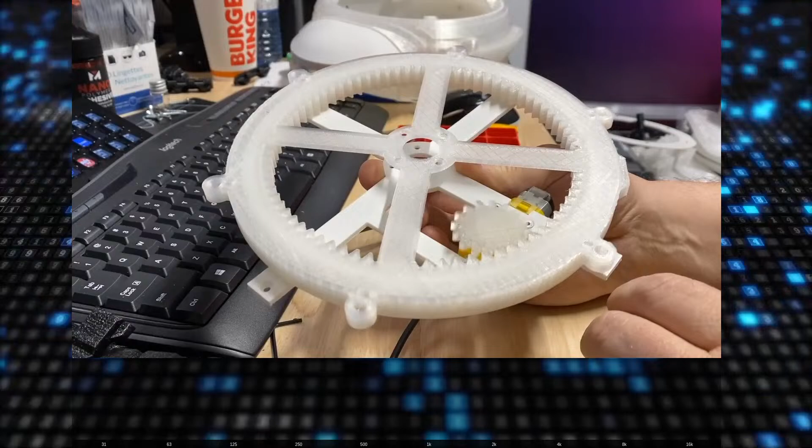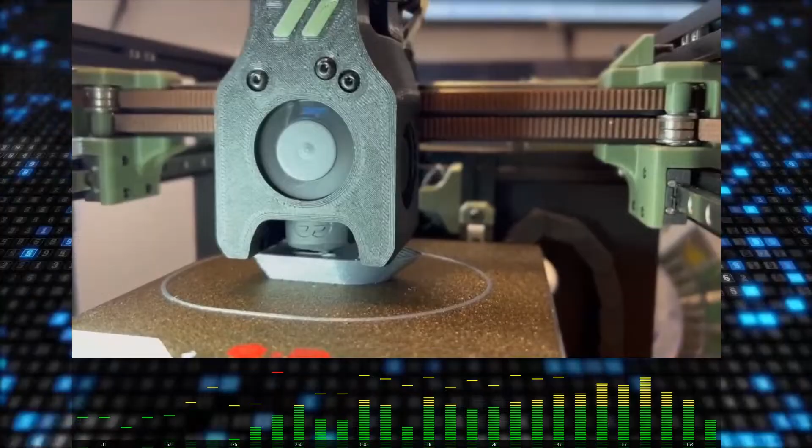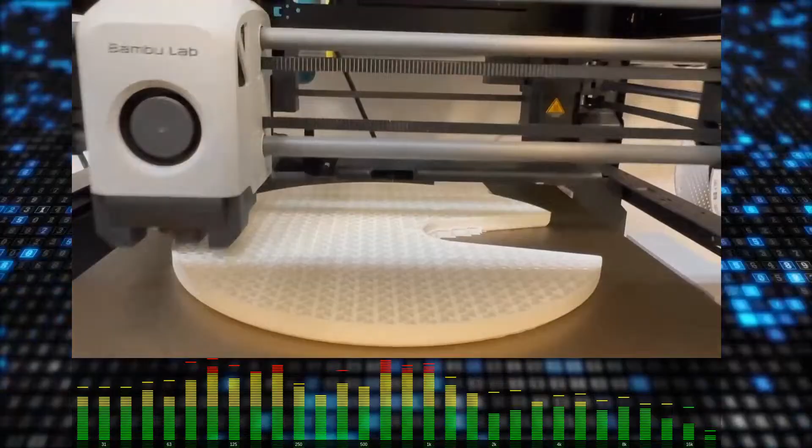Flip the switch, light the fire, idea spinning higher, higher. Testing, melting, shapes take form. Welcome to the stream, doing 3D and laser dream. Cut it, carve it, build.

Flip the switch, light the fire, idea spinning higher, higher. Testing, melting, shapes take form. Welcome to the stream, doing 3D and laser dream. Cut it, carve it, build the same.

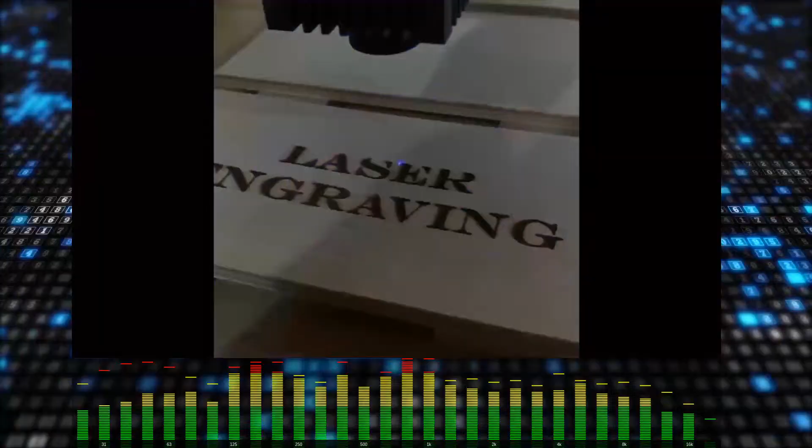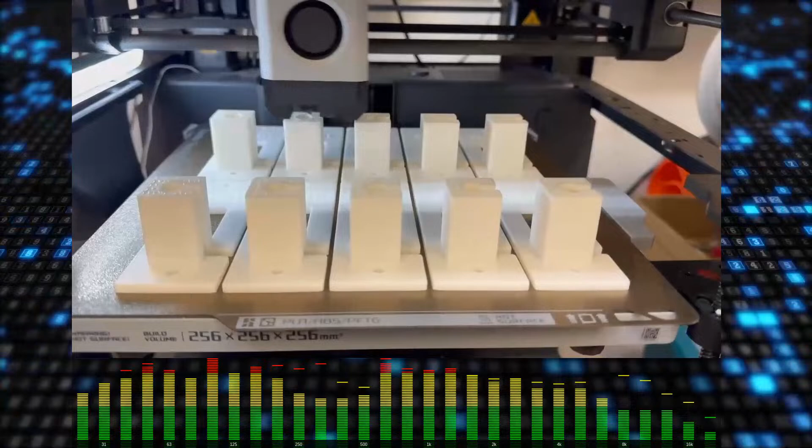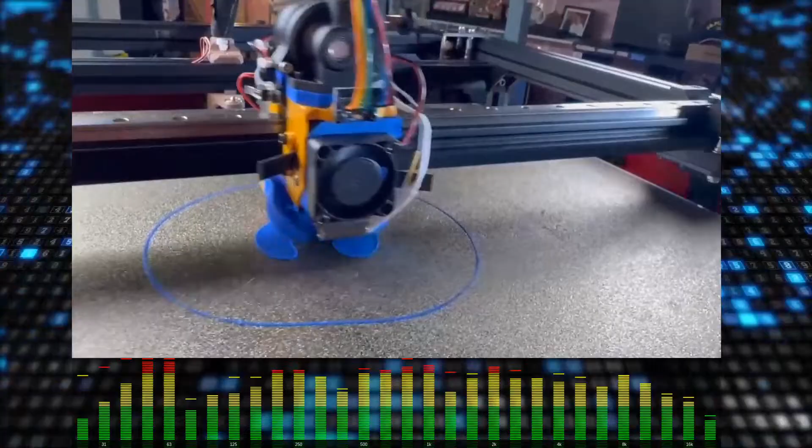Welcome to the stream. Lines of code, sparks that fly, layers stacking, reaching sky. Mistakes happen, we don't cry. We learn, we teach, we play together every day. Welcome to the stream, doing 3D and laser dream. Cut it, carve it, build the same.

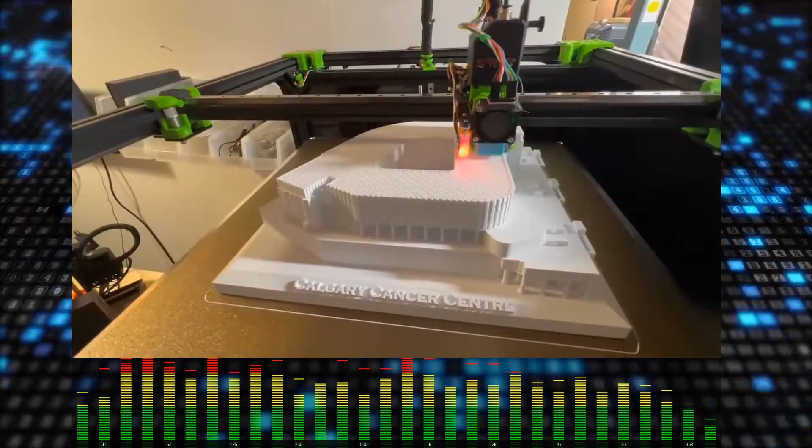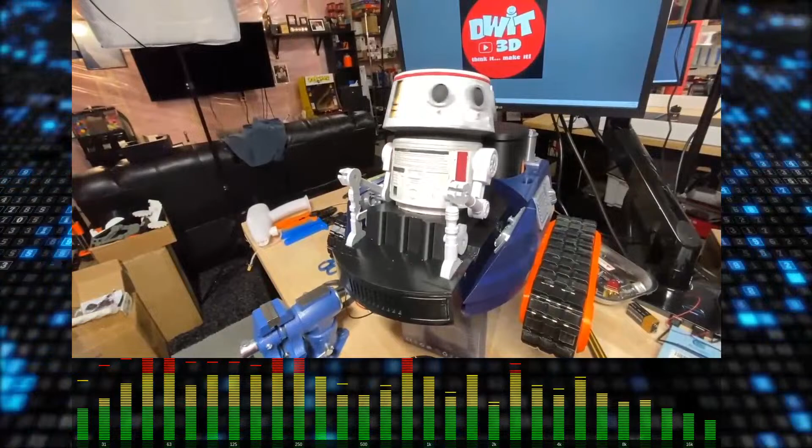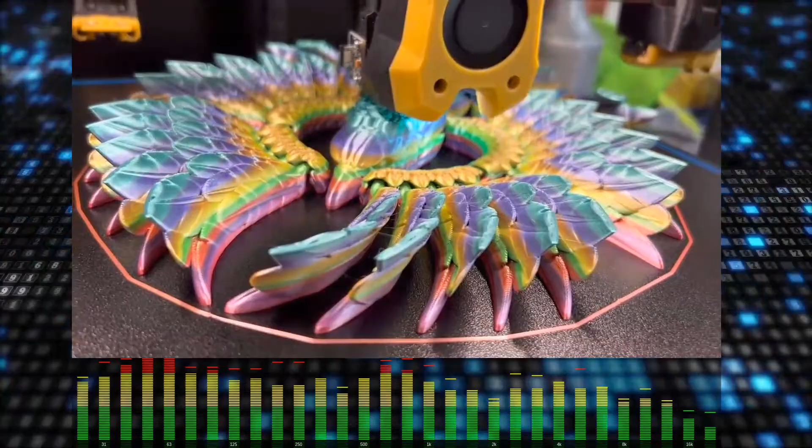Okay, I'm just kidding, I know. I wasn't talking, I was going to see how many people are going to say no sound, no sound. But I know I have sound, I know I have sound. A fake mute? How did you know? How did you know it was a fake mute? That doesn't sound good, hang on a second. Yeah, no, I think it's okay. I think I'm on the right microphone. I think I got everything right tonight. I think that is correct.

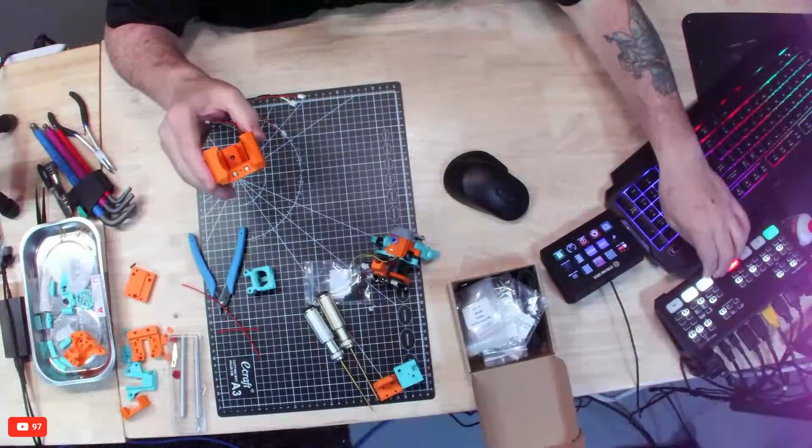But let me see if I have this set up. So don't know if you'll be able to see that or not, but what it was doing is when I pushed this one fan, the tight fan, in, it was pushing the LED holder out. You can see that gap there, whereas if I push it in, it's flat. So that may end up being something I glue in later so it doesn't keep popping out.

We'll see, let's see. Tuxedo says you'll see what I mean. He says, if you get a chance, watch Steve's stream from earlier. I watched it a bit earlier, but I had to leave, as I say. I had to get back home, I was at the office working.

Steve had the same issue a couple hours ago, the exact same issue with this LED holder pushing out when you push the fans in. Yeah, it's because there's so many wires being cramped in there, but I figure if I glue that in, it might help. But I'm just going to move on like this.

Okay, so let's see where we were in the build instructions. Let's just move on and see what we can do. And if I have to start over and print new parts, I'll start over and print new parts. This time I'll print them out of ASA.

Because I got a lot of slack about printing them out of the high temperature PLA from Polymaker. But I wanted to try, because I wanted to try, so I tried. It's my stream, I'll do what I want. Anyways, I just got a little string hanging out there that's bothering me.

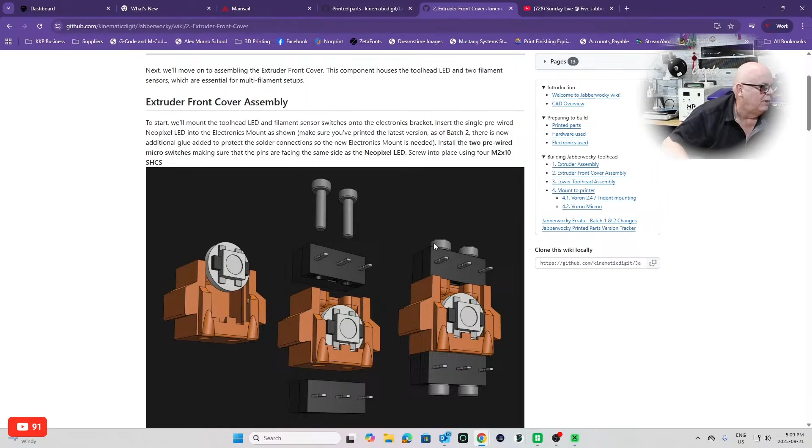So we did this. Oh, I'm way ahead of this. I'm at this part, we got this part done here. I think that's the last part we had finished right there. Let me just double check. Yeah, so that's where we're at right there in that diagram.

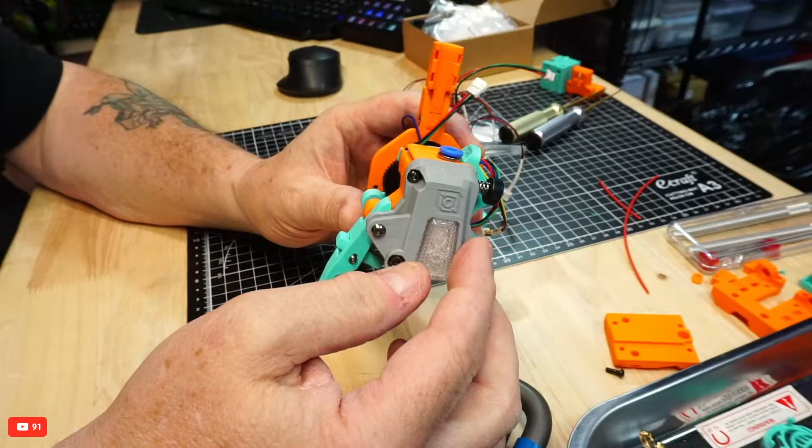So if you check that out, and then you go ahead and check out this one, I guess it helps if I turn the camera, if I cut to the right camera. So that's where we're at, where you saw right there. This is where we're at with the build. Okay, so everything in here is assembled, including the board back there.

I wasn't quite sure about how this piece is sitting on here. You see it's a little bit of a, maybe it's supposed to be like that, maybe it's not supposed to come up straight, but that's just the way it went on and the way it's working.

You're gonna sell 90-degree heat irons, come up big time. That would work for sure. So okay, so that's where we're at there.

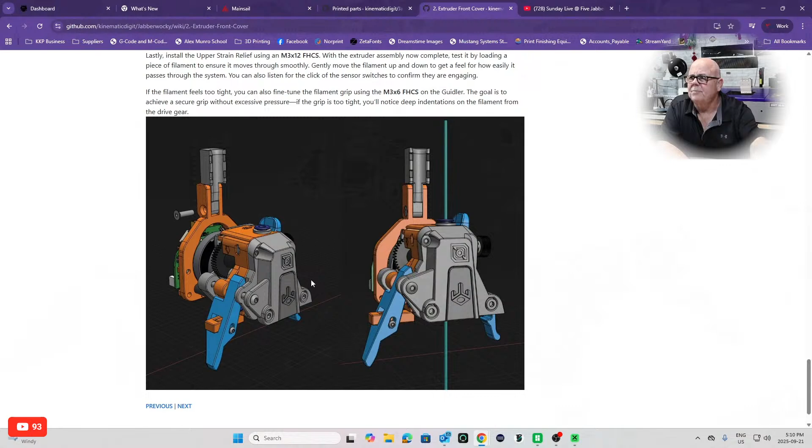Okay, and so now we got to go next. And now we get the lower tool head assembly, like so. Okay, we've already done this. Okay, we already got the lower tool head assembly finished.

Up to this point right here. Okay, there's where we got to, right there. We got the fans inserted, we got the LEDs inserted, the Hotend LEDs inserted, we got the logo inserted on the front. So we move on from here.

Although this one fan, man, I tell you, every time I try and snug this one fan in here, it keeps moving, popping this LED cover out. So we'll worry about that a little bit later. So that's where we're at right there.

Have I done this? Hang on a minute. I think I've already done this. Click for wiring image details. Okay, oh, we've already done this. Okay, we haven't done the second part though.

Push down on the wire to ensure it's sitting back and towards the left of the channel to ensure the insertion of the fan goes all the way in. Okay, now we're on this part right here.

So we are looking at the hot end. Carefully slide the conch hot end into position, making sure wires are folded neatly to the side so they can be later secured to the shroud housing with a cable tie. Secure hot end using 2 M2.5 by 8 socket head cap screws in the 2 lower holes in the mount.

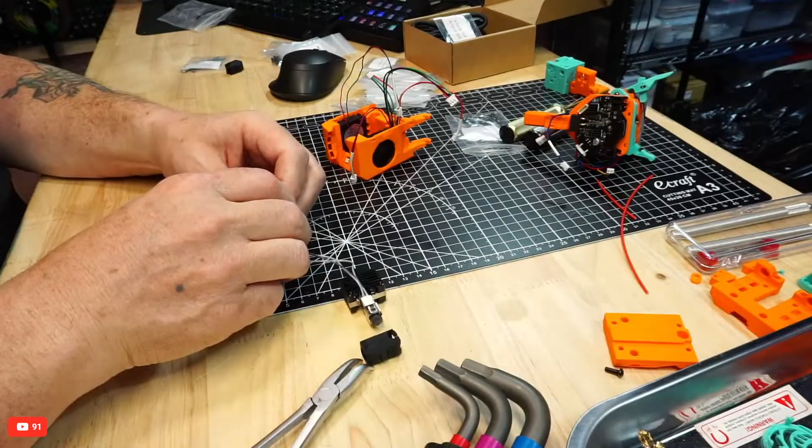You had a long stream today, Steve, if you're still on here. I was at my office for a few hours while you were on, and looks like you just finished your stream. And we got the second one going in there, okay.

So we pull these through. And this guy is going to go up. Okay, these are going to go around the back. And this is going to go in, like that. Looks like exactly the way that's going to fit in, just like that. And our little 2.5 by 8mm screws are going to go in here.

And the other... I'm trying to think what that other threaded insert we did in here was for. That was down in the middle right here. So I'm not sure what this threaded heat insert in here was for.

So Steve pulled a 6-hour stream today. Wow. Hey, Brent Ferguson, why so short? Who else popped in there? Jimmy John, I agree the ability to rotate the model is nice, which I had when building my 2.4. Yeah, do they have that for the 2.4 now in the other Voron builds? The rotating model thing is beautiful. It was beautiful.

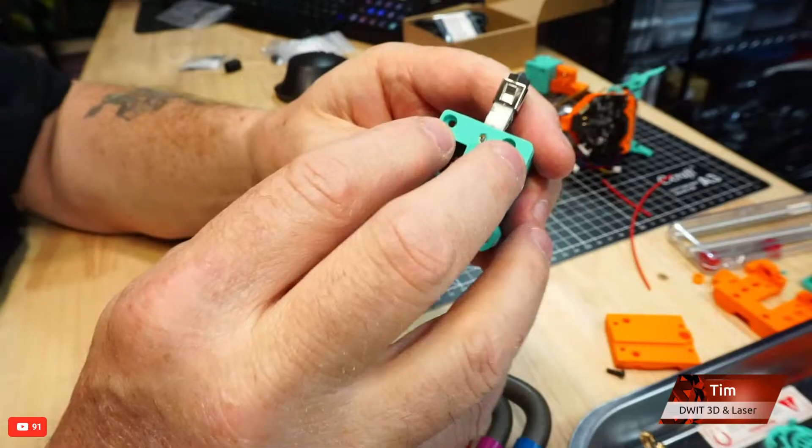So okay, we got the hot end in. I'll just show you here like this. We got the wires coming out here, and the wires are obviously going to go over to the side here like so. I've got to get those 2.5 by 8 screws so we can secure the hot end here.

So let's find those 2.5s. Where did I put all my screws? Right here, right in front of me. Let me switch to this other view here so you can see.

And let me switch to this... oh, wrong one, come on. Which camera do I want? That's the camera right there. Hopefully that's in focus.

2.5 by 8, 2.5 by 8 right there, 2 pieces.

That's what she keeps saying. Heidi ho, Jack Faxon.

Okay, 2.5 by 8s, and that's going to be this guy right... no, it's going to be this guy right here. Let's secure these in. This is obviously threading into the heat sink.

I have a black mat with black screws. I should turn the mat over. I think it's green on the other side. That'll be easier to find my screws. And here we go.

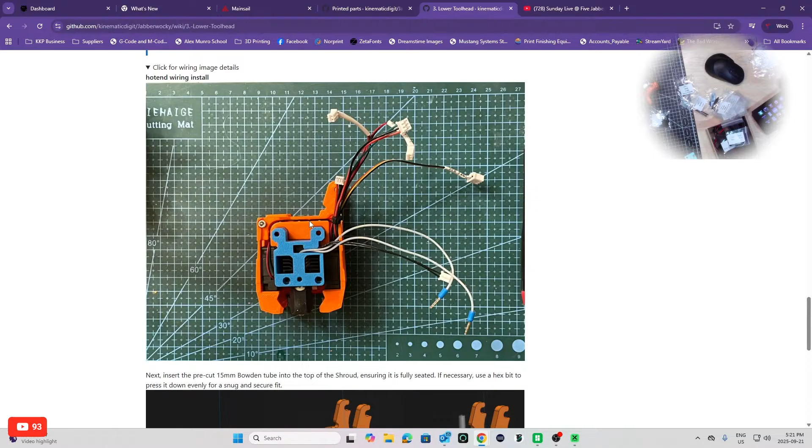Okay, so we're going to be sliding that in. We got the wiring coming out the back, like so.

Okay, so let's go back to this. So this is gonna all, let's get all this wiring out of the way. When are they gonna come up with wireless hot ends? Jeez, that'd be so nice, wouldn't it? Heat induction hot ends. Okay, so we have all that here.

This is gonna slide in here, ideally, like this. Get those fan wires out of the way. That'll slide into that, just like so. Looks all right, I think. Okay.

Okay, man, that's a lot of wiring. Okay, cool. Now that's all got to be tucked down somewhere, because of course we're going to be matching that up with the other part.

They do have induction hot ends. They're not cheap. Oh, hey Kit.

Too funny. Okay, let's go back to the display. So we're at this point here. Their wiring looks a whole lot better than mine.

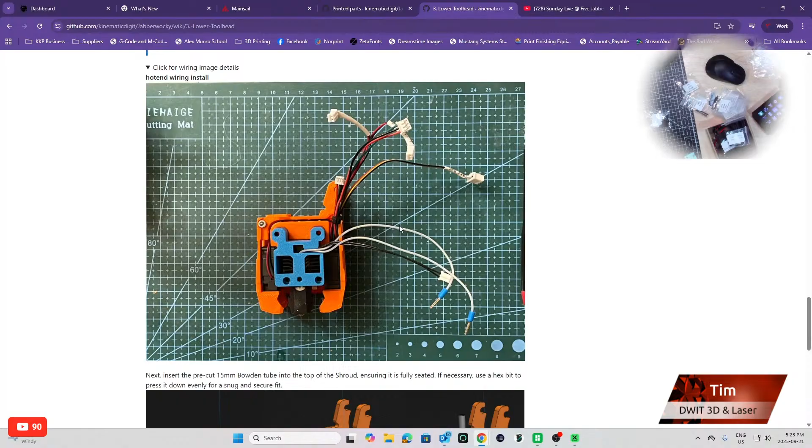Do they have these wires secured here? Let me just have a peek back here. They have these wires all, it looks like they've got a zip tie in there. They do, they have a zip tie on these wires already. Let me grab a zip tie, it'll make things a little easier to work on here. I'm just looking at the image, and they've zip tied to this tie right up here.

Okay, so let's see if I can't get some of these wires. So we have this fan wires coming from over here through these grooves, right on the top. Okay, so we're going to shove it down there, down through there, down through here, across here.

I want to move the hot end wires out of the way for a minute. Down through here, and you're coming up here. All these other wires are coming up here, and they're all going to meet up right here at this zip tie hold. Throw a zip tie in here.

Timor 714, you're here, just very quiet. Someone has to watch the animals. There you go.

Okay, and I'm gonna get this zip tie going. Speaking of animals, my dog just popped downstairs. Okay, so we'll get these guys all bundled up in that groove there.

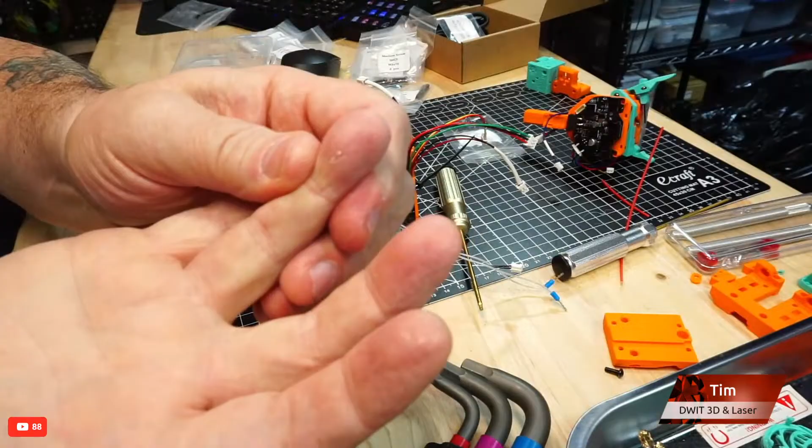Okay, that's where we're at, right there. Boom. And by the way, there will not be any blood today. I know I said that last week, and what I ended up doing was slicing my finger. That was a finger I sliced right there, and it's pretty much all healed. So, no more blood.

Okay, hot end wiring install. So we got that almost looking similar to that, except it looks like I'm missing a screw up here for something. What's supposed to be up here?

The image there has a screw right there. See that hole right above my finger right there? There's a screw in that hole holding something in there. I don't think I missed a step, but hey, who knows, I probably did, knowing me. So we'll see.

Flag warning? Yeah, I'm just going to back up a bit and see. That screw right there that they're showing in place, I did not see anywhere where that screw would have been put in.

And no, I don't see it. It's not in here. Oh, right there. Okay, right here. I missed that step.

For the right side fan, for the left side fan, install the wiring. Finally, install the fan grill. This is a push-in fit part.

Okay, where does it talk about this screw? Then install the M325 screw which is used to latch the extruder to the lower tool head body. Okay, M325 socket head screw. There we go. I'm glad I'm at least looking at the pictures because I'm not fully reading the instructions.

That's this guy right here. So the pre-cut 15... What's going on? Why did that go blank? Okay, fair enough, my bad.

Right there, that's the 15mm piece of pre-cut Bowden tube that we want to insert. So let's go back here and find that. Here, let's switch back to this guy. 15mm Bowden tube, and right here, two pieces, 15mm Capricorn tube. We have those pieces.

Oh, people are dropping off like flies. We're down to 84 people watching now. They didn't want to win any Polymaker Filament.

Okay, so this guy comes in here, and this guy goes in the top. Well, is it just me? Or, okay, here's another little...

So if you look at the instructions right here, look at this image right here. We show a 15mm piece of Bowden tube going down in the slot. Oh, then we slide the little thing in. Okay, I've slid the little thing in first. Okay, I get it. Okay, so let's go back here.

So I have that little thing slid in. I just got to pop that out front a little bit, and then we're going to take the 15mm piece of Bowden tube. We're going to shove it in the hole. We're going to make sure it goes in flat like that, and then we're going to pop that little guy back over. Okay, and that's going to kind of hold that into place right there. Right there, look at that. Okay, there we go.

And go back to the instructions. Okay, we've done the 15mm Bowden tube. Just want to make sure I haven't missed anything. Okay, we're moving on. To complete the toolhead assembly, we'll now join the extruder with the lower section of the toolhead. We're going to marry them together.

Okay, first slide the F682ZZ bearing over the 15mm Bowden tube, which we did. If it doesn't fit, ensure the Bowden tube is fully inserted, which it is. Next, align the top and bottom halves of the tool head. Slide the lower body latches into position so they hook onto the long button head cap screw that secures the filament cutter. Once aligned, seat the top half of the tool head horizontally and lock it in place using the lever lock. Expand view for final wiring arrangement.

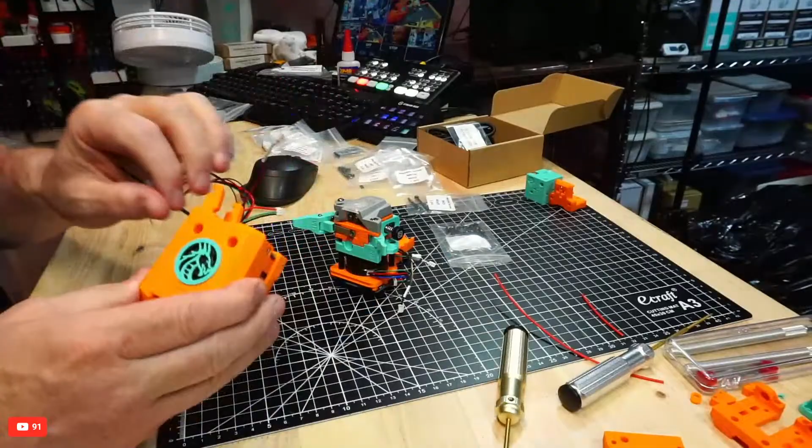Let me cut this, just got to cut off this zip tie thing so it doesn't mess me up. There we go, okay.

And this is going to go, so we're going to align the bottom halves of the toolhead, slide the lower body latches into position to hook onto the long button head cap screws that secure the filament cutter.

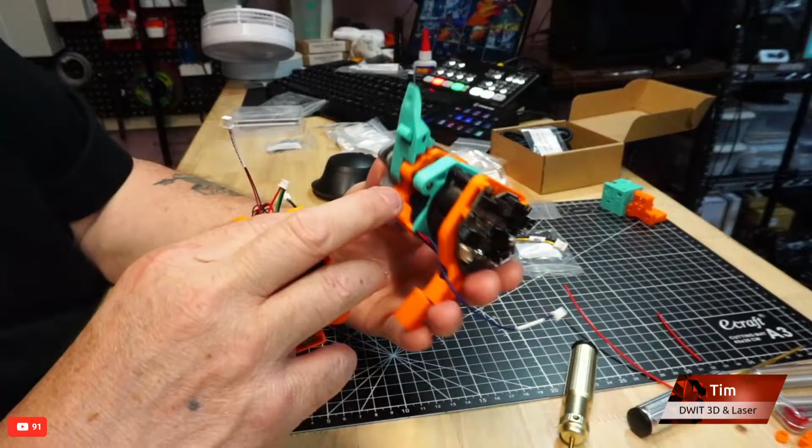Okay, so these are the two that they're talking about right here. We have this one here and this one here, which are going to align onto the latches that are here. So ideally, these are going to go in here.

And align with those latches. Hang on a sec. Oh, like this. Okay, we got to come down like this. Slide them in.

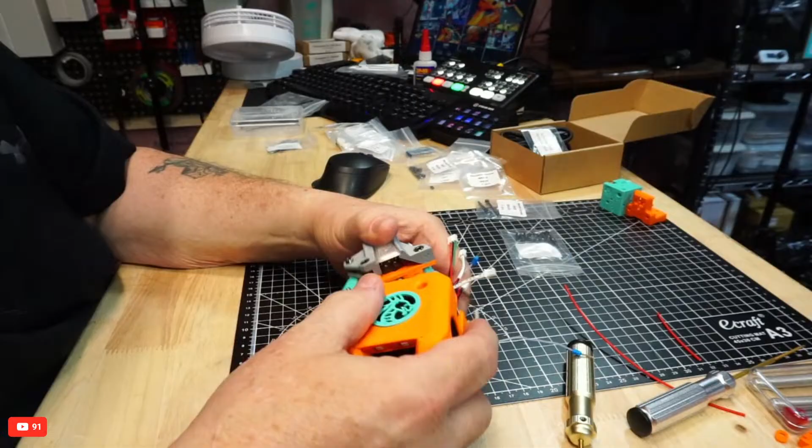Okay, this is just a little awkward for me, that's all, but we'll get it. We'll get it.

You tell them, Jerry. There might not be much to like, but hey, I'm trying.

Okay, we're going to slide that in. There we go, so you've got those slid in on those two button head cap screws that are in there. Then we lift this into position.

Ready? It's like a Pac-Man. It's going to close like that. And then this is our latch.

We tighten that down. Oops, we tighten this down. And oh man, that's tight. That's what she said.

We tighten this down, let's just see. We bring this down. Something is not fitting. Something is not fitting right in here. Something is not fitting, but let's just see.

I pulled this thing out a little there, there we go. That's sat in there now. We bring that down and then we can latch it in. There we go, we got that latched in.

I just had to sort of pressure this guy into falling into this little groove. We latched it in with this. So obviously to take this apart and repair it, we unlatch it and it pops right out. That's pretty cool design, I suppose.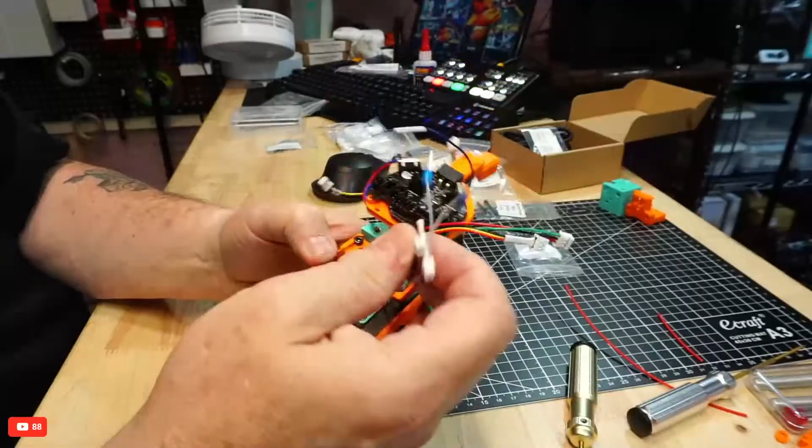Okay, and then there's all our wiring in the back. There she goes, just sort of everything is hanging out loose there. And there we are in the front.

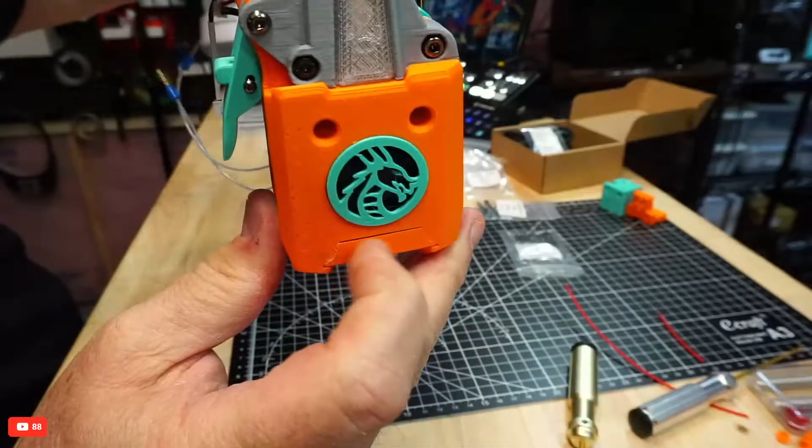So far this pretty much, that LED holder is pretty much staying in place. It's not as big a gap as there was before. Okay, so there we are.

And then the filament cutter, oh, that's very tight. That should not be that tight. That filament cutter should be able to rotate in and out without being so tight. So something is a little too tight there.

It may be these screws up, this screw up here. Let me loosen this one off a bit and see if that makes a difference. No, that's still extremely tight, I shouldn't have to pull that back out with my hand. That should basically be pushing in and out on its own.

I think what happened is when I put these little latch things over the screw, it spread these out, putting pressure on this piece here. So what I may have to do is actually file down the edges of this piece here so that it doesn't bind, but in the meantime I can try and loosen this off a little bit more without it coming right out of there. No, and again, that's way too tight.

Sand the blade carrier a bit like Steve did. Yeah, that's exactly what I got to do. Let's go ahead and pop this back apart. Obviously it's not like I did anything wrong, but if Steve had to do it, then obviously it's something that has to be done. Not that I don't put a lot of respect in Steve, he's been doing this a lot longer than me.

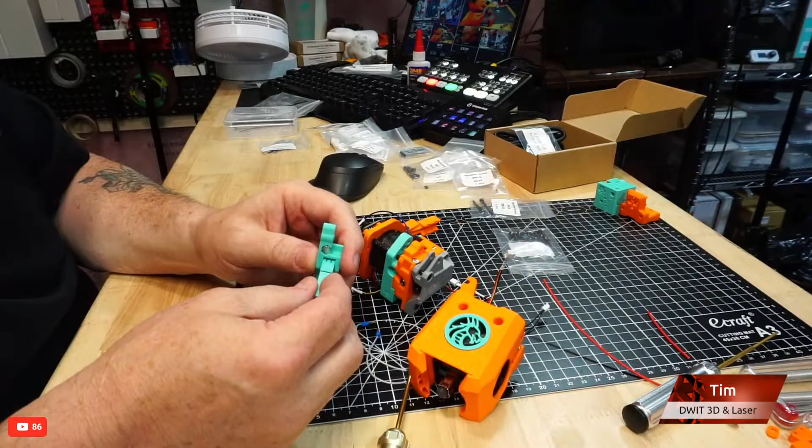Although that's not going to stay on the best, but what I'm going to do - I fool me once, shame on me, shame on you, right? Fool me twice, you know the old saying. I'm just going to take a little piece of tape here. Where's my knife? Where's my knife? Just going to cut and... this is just my own protection, this is not what you have to do. I'm just going to quickly tape that right there so that blade is underneath.

That really didn't do much, did it? You know what, I'm just going to risk it. The heck with it, blade cover be gone. We're just going to risk it. If I bleed, I bleed.

Okay, where's that little file I used before, which worked quite well? Where did I put it? It was right in front of me. I swear to goodness it was, there it is, right here. This little file - sandpaper works too, but this little file, it's not really rough. So we're just gonna give this a good little... it's just this top part here that needs it. I'm doing this because I really don't have any sandpaper down here, but this file works just as well. There we go, it's taking my finish off, but that's okay.

I confuse easily. Those of you that have never tortured yourselves and sat through a whole stream of mine before, I confuse easily. Here we go, I think this is correct here.

Down to 76 people, cool. Long part of the lever goes down. Yeah, this is the way this goes in right now, though.

Let's get this screwed in here. Okay, we're good, that's in there. This now goes in here. That's right, okay. And we have our screw here, through here, through here, and that is correct.

There we go, we're all set. We're good. Okay.

Ouch. It's okay, it's okay. I'm fine, don't worry.

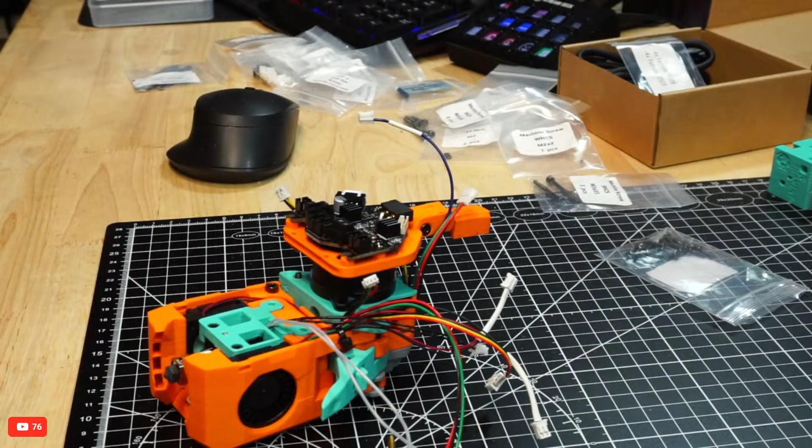The heater wires are obvious where they go, and there's non-polarity, so it doesn't matter which one goes where. But these are obviously going to have to come up. I probably should have tied the heater wires in under that same cable zip tie I did here, so I may have to take that off and just secure them again, but we'll do that in a bit. Let's get them put in there first.

Okay. Let's grab this, we need a small flathead. Here we go. Okay, we will, now let me get this closer. And we'll zoom that out a little bit here. Here we go, so we'll loosen these off.

These are the obvious ones. Okay. And we'll go left and left and right and right.

These ferrules are a bit long. Oh, that's probably fine, sometimes I like to trim the ferrules. And I might just trim it just a tad off the ferrules here so that there's nothing sticking out. There we go, that's better.

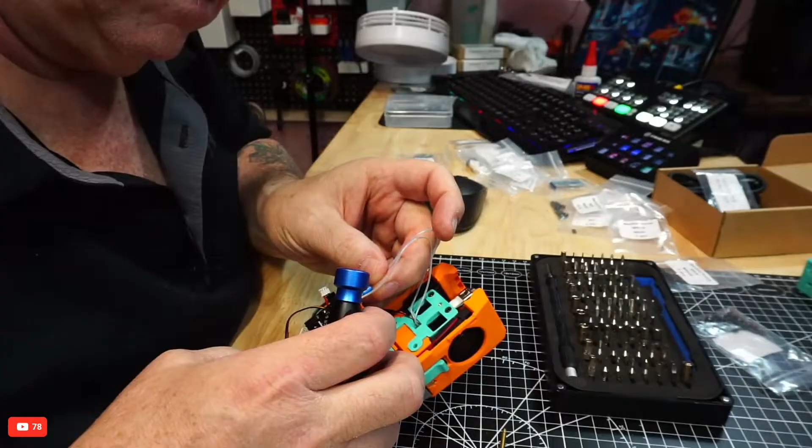Yeah, I just didn't loosen the screw enough. Cut the tip of that one off. Bring you in. Like so. Okay, heater wires are in. We're going to have to settle them down in a bit. That's fine.

Now, top, we have the yellow. Now, I can't go by wire colors, so this says top. So this one's coming around, and this one is going into here. Man, I have a hard time reading these, what they are. I cannot read that, but I'm just going by the pictures. Into there, right here. And then we have bottom.

Let's see, what are these? Heck. Part fan. Part. There's bottom right here. These are the filament sensors that are in there. Bottom one goes in this plug right here. And this goes right in here. Like so. So we have the top and bottom sensors.

Then we have one of the fans going in over here. So that is going to be the, let's go the HEC first, let's go the hot end cooling fan first. Let's get that plugged in. Hot end cooling fan. It's going right in here. Like so.

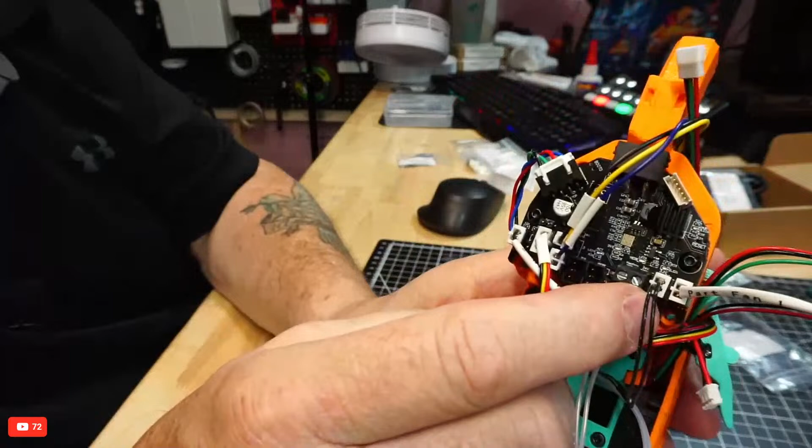Where's the thermistor going? It looks like the thermistor is not labeled, but it looks like the thermistor is going right here. Right there looks like it's where the thermistor's going, right in here, right next to the ferrules where the hot end is connected. That's the thermistor right there. We got the thermistor going in right next to the ferrules.

And then we have this, this is one of the LEDs here. This is the tricolor, the tri-wire LED. I don't see them. And then this tiny, tiny short LED wire here. That will not reach anything in there.

So far I have, here, let's just switch back over to this. Okay, so far we have the part fan 1, part fan 2, hot end cooling. We have the top and bottom sensors right there. Okay, so right there is obviously, that looks like the LEDs right there, the 3-wired LED.

Okay, so that's going to be this guy right here. Will come in underneath. And this guy goes in right here. Let's come in from underneath here, trying to keep these wires as organized as possible. Oh man. So this looks like it goes right in here. Like so. Okay.

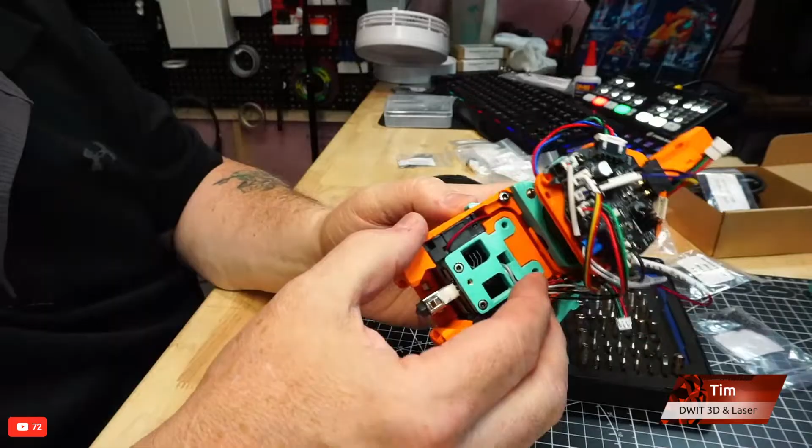There's a female connector coming out of the extruder, connects to the LED male connector. Female connector out of the extruder. Is that a separate wire? Was there another? Let me have a look at the diagram there and just see.

Oh, I see. Okay, I think where you're looking is right here, this connector right here. Okay, so. Oh, there it is. Okay, I see it. That's the one that's hanging up there, the stray. Okay, so that's this guy right here. Oh, okay, so that's coming out of there. We can tuck this little guy under here. Actually, let's bring him under all these.

Okay, so that doesn't plug into the board. That makes sense. Now, I didn't even see this female connector. Come on, get up there. We got to mate you. So you're going to go in. Make sure I get you in the right way. Right there, this little guy right here. Okay.

So is there any way to zip tie these in place up here? I guess not.

Okay, well, I've got all the wires connected now. R-rated, don't look. Secret rendezvous.

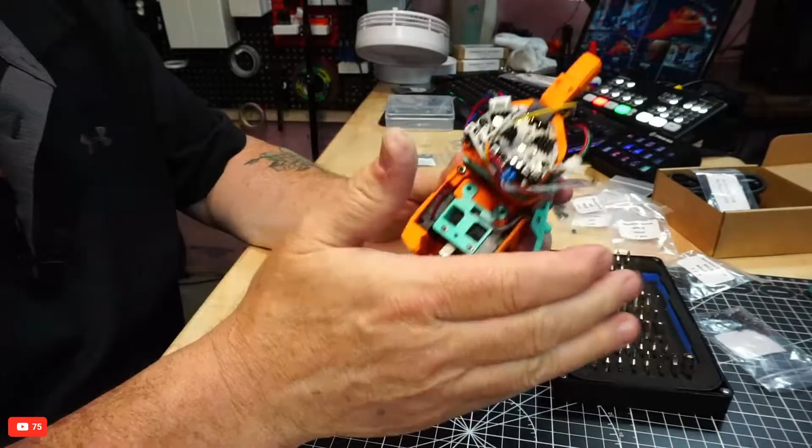Now there's probably no reason, nothing going to be here, but this is going to mount to the carriage. So we want that to stay as flat as we can. Obviously the screws are going to be coming through here that are going to mount to the carriage. These wires still look like they're going to be in the way though.

I don't know if they're down low enough there, because I think these wires should be now coming sort of up and out right along here, because I can see them being a pain when you try to tighten that on if it's not flat against our thing there. Who's message?

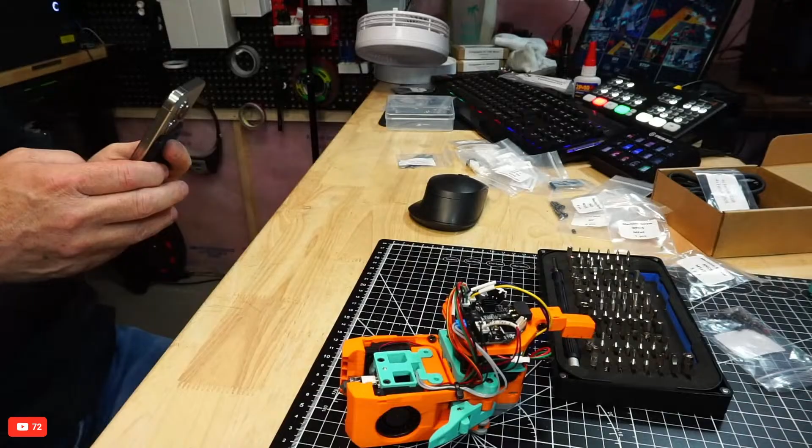Ah, I just got a nice message from my wife. Yeah, let me look at that.

See what I mean? This is not going to allow this to sit flat when it goes onto the mount, which I assume is going to be along the lines. Oh, maybe it will. Maybe that doesn't have to sit flat. I'm not sure what this part is for, but we'll figure that out later.

There's a zip tie point on the tool board frame you can use. Oh, right up. Okay, let's have a look and see where. Oh, there's a couple zip tie points there. There's one right here, there's one right here, and... No, that's the only two I see.

I want to redo this one. It's a good thing I have a lot of zip ties. I want to redo this one because I think these wires need to sit a little flatter going up this side. There's just a lot of wires.

Okay. That might be good, but then the zip tie is going to hang out there. Hang on 1 second, there's a space right there. Oh no, it's just too many wires. I think it's probably going to be fine. I'm probably overthinking this.

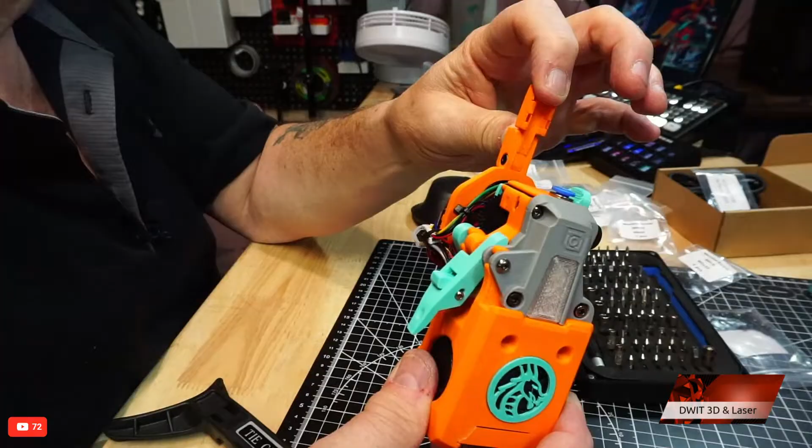And then, of course, this is where that's got to be on backwards. Or why? I don't understand this piece here. Oh, they don't show that. See, they're not showing that piece. Or yes, they are showing that. See, the instructions are way behind again, because if you look at the top of that and then you look at the instructions at the top of that here, it's totally different. But that's okay, we're good.

Where's my water? I need a water break. So I think this is good. I think this is good the way we have it.

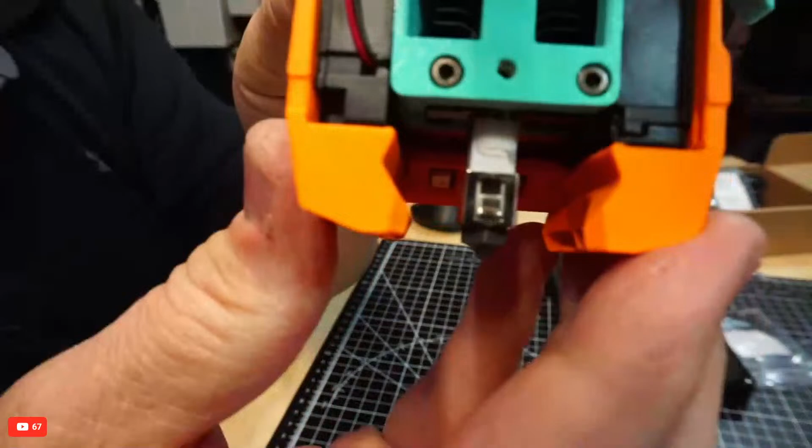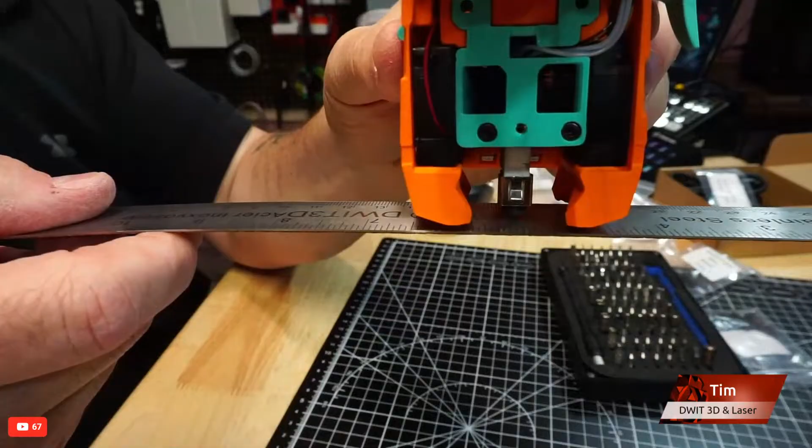So yeah, I'm just going to look at the mounting onto the printer. Is that hot end? Oh yeah, boy, that is going to be really close to the bed when you look at the clearance. Hang on, let's look this way. When you look at the clearance the nozzle has where the fans are, that is going to be really, really - come on, let's get that level here. It's going to be close, very close to the bed. But hey, it works. It works.

Now, the other thing I got to look to put on is the beacon probe mount. Where is the beacon probe mount going on in this? Huh, I guess that's something I need to think of as well, because I printed out the beacon probe mount, which was this. No, this is the carriage mount.

I think I may end up needing new belts. That's going to be the carriage mount, which is going to go in something like - don't be guessing. Yeah, I think we're going to be okay where those wires are. Okay. Even though it looks like it's backwards. Oh, this looks like it's backwards, but I guess it's not. It's there for a reason, I suppose.

Why is that still sticking a little bit? Not as loose as it should be. Yeah, I think we're good. Okay. Okay.

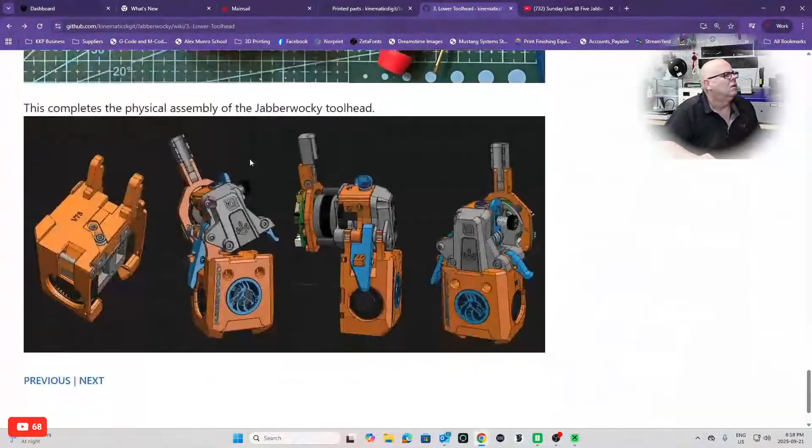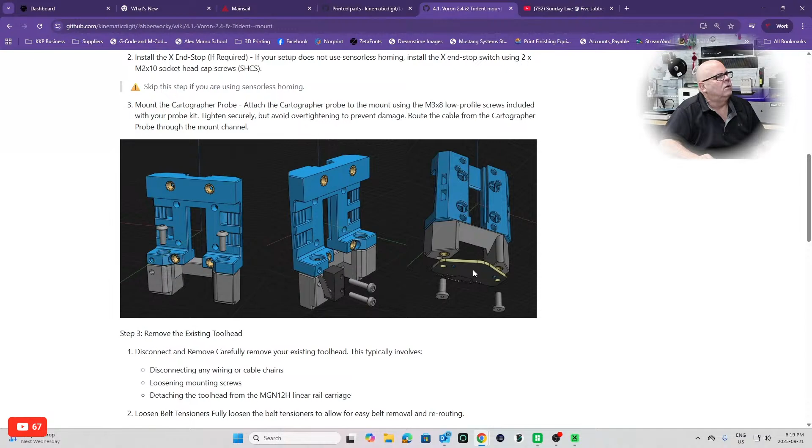Because I do have to put the beacon probe on here, and I'm just looking - let's have a look here and see if it talks about the beacon probe. Mount to printer. Oh, I guess I can make this a little smaller now. Control minus. So we're using the Voron 2.4, so those are the mounts we're going to use. Oh okay, there's the probe mount - it's going to go in the bottom right there. There we are.

Okay, well let's go ahead and look at this part right now. I can't mount it on the printer, but I can get it ready to mount on the printer. Another 10, 12 minutes, we're going to do a draw, guys.

Okay. So we need some heat inserts, so I got to get my heat insert tool out. Prepare to burn. Where did I... took that whole heat insert tool thing apart. You can't figure it out either.

Where's my heat insert tool, or the soldering iron, one of the two. There's the iron, there's the tool. I'll just put this back together real quick, it'll be a little easier to do these heat inserts that they're asking for. It doesn't take me long. This goes on here, this goes through here. Come on, get in the hole, I know what you're thinking.

Get up there, there we go. And then we just need to get the right size key, which is right here. And these are gonna go, you guys gotta space out properly. There we go, okay, let's get this back together real quick.

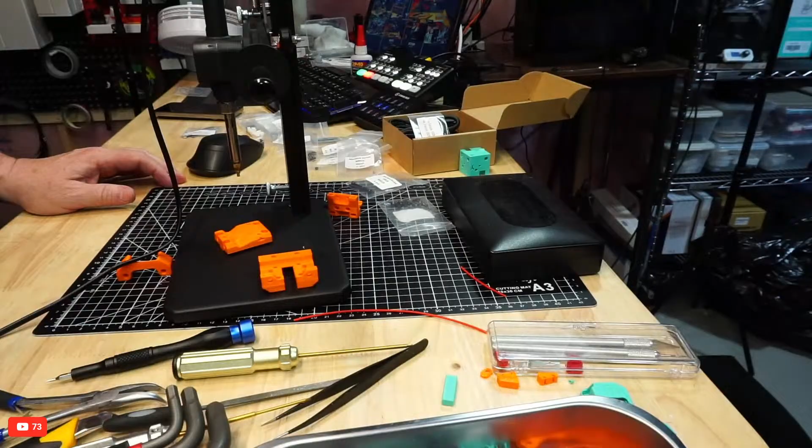Let's cut to this guy. So this one on the front, see, this piece looks different. Looks so much different. Hang on. So we have 2 going in here. It's missing a groove in here, but that's okay, I'm going to trust that it's not supposed to be there. 1, 2. 2 in here. Are we hot? Oh yes, we are very hot. Okay.

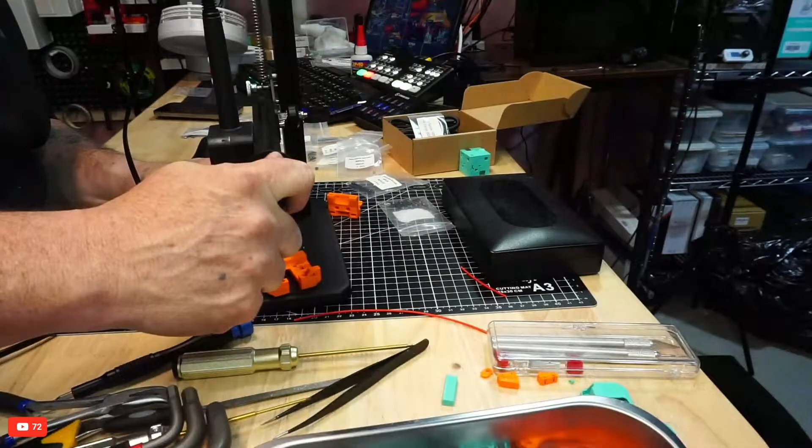Okay, 1. I just realized my hand's right in your way, so if I burn myself, you won't be able to see. It doesn't matter, they're all going to melt. Here we go, you think these parts are going to melt? Seriously? That's okay, if they do, they do, give me an excuse to rebuild it. But hey, if I have to rebuild it after printing the parts in ABS, or is it ASA I got? What did I get? Oh, I got ASA.

If I have to reprint the parts in ASA, it'll be an easier build because I know how to put it all together. But just so you know, I have the ASA ready for this. Somebody a couple streams ago said it must be nice to be getting the filament, you can waste it, blah blah blah. Well, you know what, it's called artistic license. I want to try something, so I'm going to try it.

Okay, we have 4 to go in here. We have 1. Here, hang on a minute, let's go back to this one. There we go, we have 4 heat insets go in here. 1, 2, HTPLA, no they're HTPLA.

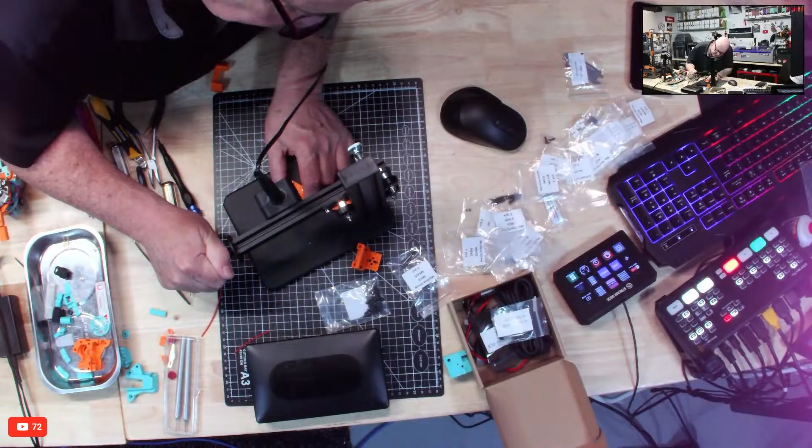Because HTPLA actually stood up better in testing from the videos I watched than PETG. I am breaking all the rules, and I'm okay with that. I'm a rule breaker or a rule bender, whatever you want to call me. Idiot, whatever you want to call me, it's fine.

Okay, those look good, 2 more to go in. Okay, those heat insets are in that one, we got the 2 heat insets in this one. Now we got to put 2 in here and 2 in the bottom here. I think I wrecked a couple, so I'm going to have to pull some out of my kit. I wrecked a couple in the previous stream. Okay, whoop whoop whoop whoop whoop, there we go.

Those look good, and 2 more. I only have 1 more in here, so I'm going to grab some. 1 here. Okay, and I got to grab 1 more here. Uno momento, por favor, I think it's in my yellow kit. No, it's not. Where are they? There they are. One. There we go, final one.

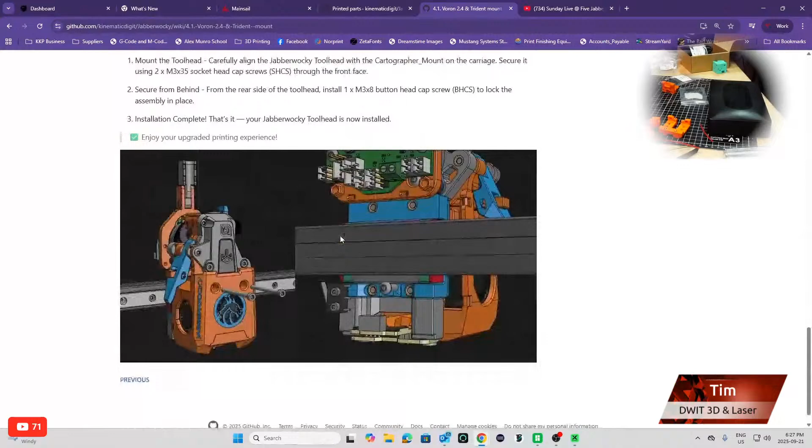Okay, I think we're done with this guy for now, so let's unplug it. Don't call you Shirley. Hey, let's get you unplugged. Okay, put you somewhere where I won't hurt myself.

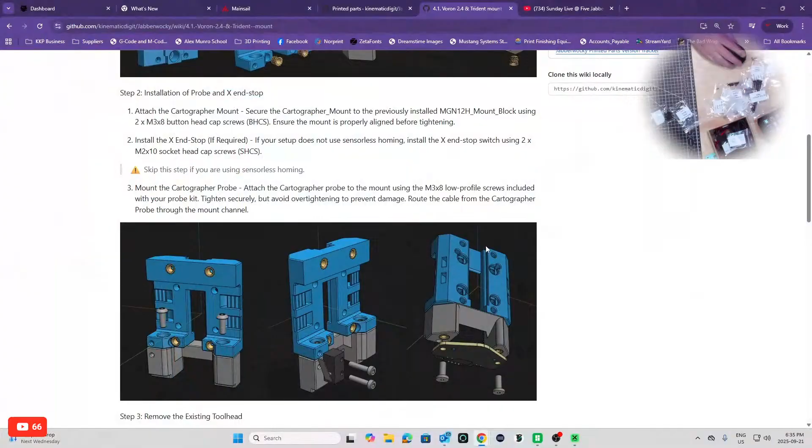There we go, okay, so next we are going to install the X end stop if required. If your setup does not use sensorless homing, install the X end stop using 2 M2x10 socket head cap screws.

Am I using sensorless homing? I don't believe I am. And do I have the X end stop in the kit, or do I have to take it off of my other hot end? I probably have to take it off my other hot end, would be my guess. Yeah, I'm pretty sure they didn't include that in the kit, so that's going to have to come off the other hot end. And as I say, I think I'm going to need new belts anyways. So let's go ahead and move on from there.

Let's do a draw. I'm going to set up the draw here. Bear with me, 68 people watching. Good, it's going to be a lot of people entered in the draw. So don't try and guess what's going to happen with the draw yet. Don't put any words in the chat yet, because you might be wrong. You're going to see something pop up, but I'm going to change it. No, maybe I won't. Here we go. Oh, that's the last week's winner. Look at that, we have the old winner.

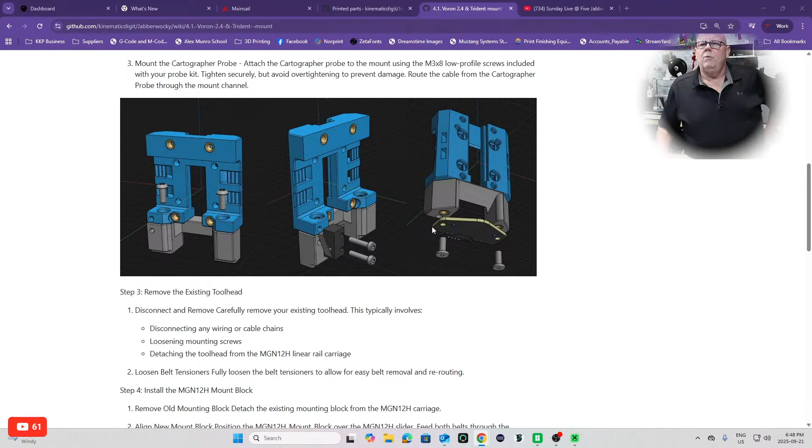I just want to see what else is going on in this, see if there's anything else I can do to this before I take away the... you just got a new 100-inch TV that you're watching me on.

100 inches? Oh my goodness, I better suck this gut in then.

Existing tool head, okay, this is going to be disassembling the tool head. We're going to be mounting that part. That part's going to mount right onto the... okay, that's going to mount right onto the linear rail. Okay, that's this part here. Now that actually does not make much sense.

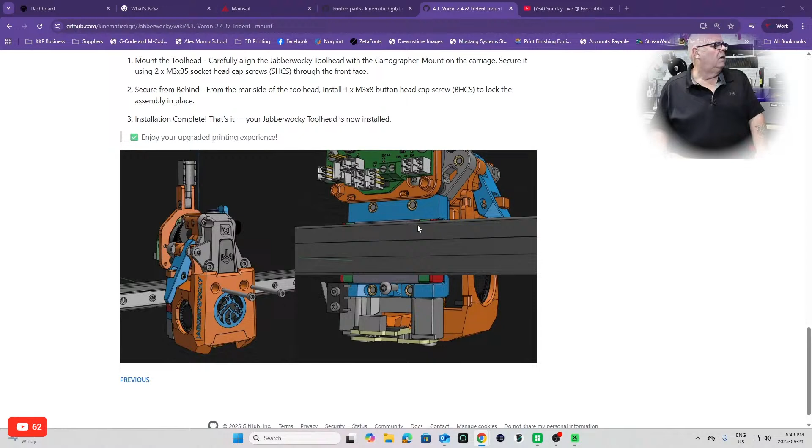That's going to mount onto the linear rail. Then why do we have... okay, anyways, who am I to question it? And then we mount the V75 - see, I have a V70. We mount this onto there with the two screws. Okay, and or the 4 screws, that's going to mount under there with 4 screws. And then, okay, I see what happens there.

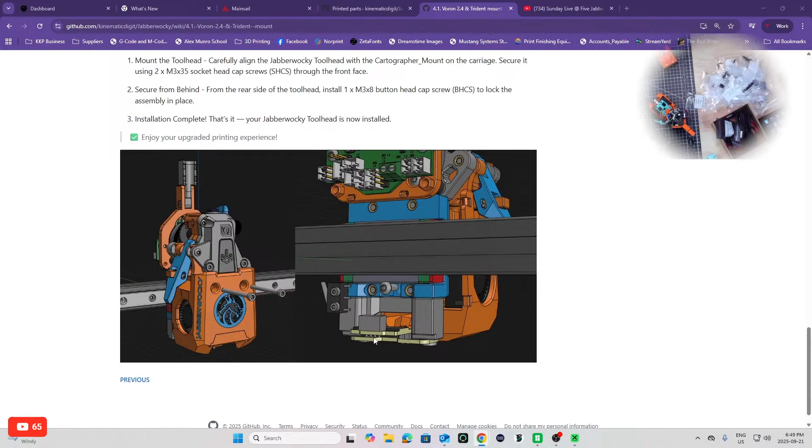Very interesting the way this is going to work. And then, on the back side, okay, so I see, so the way this looks like it's going to work... whoops, too many buttons here to push. So this is going to mount on... I just don't know how the belts are going to tighten. That's what I'm looking at here. I'm overthinking this maybe.

So this is going to mount onto the linear rail, like so. Or maybe this other camera would be a little better. This is going to mount onto the linear rail. Let's zoom out, like so, through these 4 holes, screwing it onto the linear rail. Then this is going to slide down in the groove, and we're going to secure that to this with 4 screws.

Then the hot end is going to come - 2 long screws going through there are going to mount through here into these holes right here, and then from the back side we're going to mount another screw through here. It's going to go into this one right here. That's what that other threaded insert was for on there.

Right on there, so these 2 here - these 2 outside holes here are going to basically match up with these 2 holes there. That's going to go up out like that. And then we come through the back side here, screw that's going to go into there. Now...

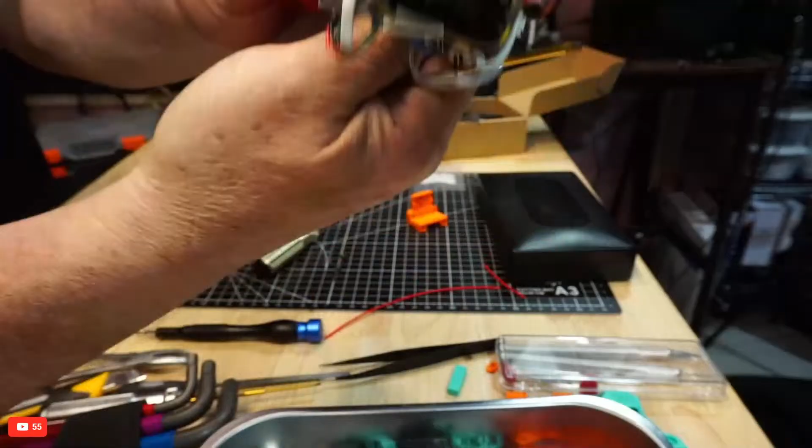Okay, so I popped an M3x35 in here, and you can see where that comes out right here on the back side. So that's going to mount, go through here. So basically what's going to happen is that'll be all - oh, hang on, so just so I'm not confusing matters here.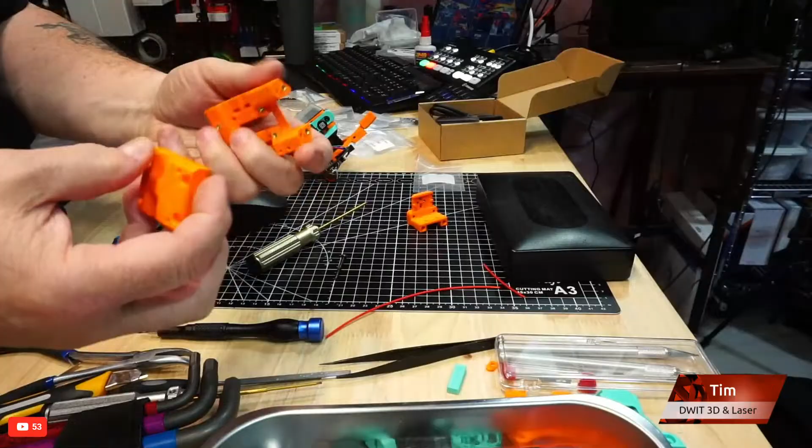This goes on like that - this is on your carriage, just like this, okay? This is then going to be sitting here. You're going to come with your mount, your hot end. Your hot end's going to come up, it's going to sort of sit up here, like so. You're going to tighten your M3x35s through.

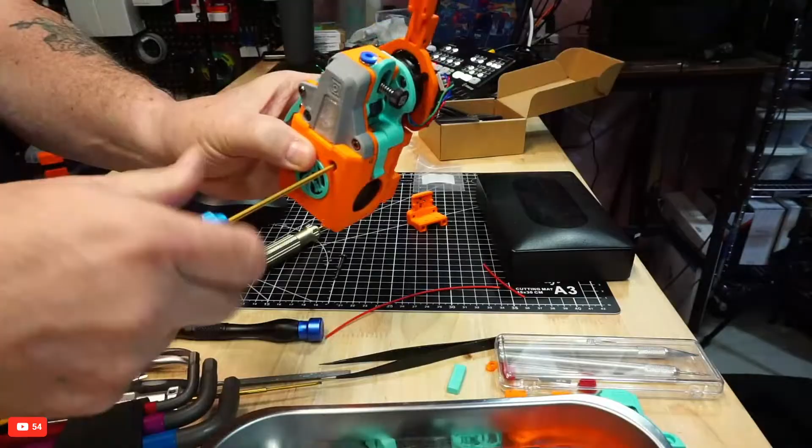Let's just see. Or are you? No, you're not. Okay, so this is interesting - that's not tightening, it's not reaching. You can kind of see.

Now, see that there's a little nut insert right there? Once you put a nut in there, that thread is going to reach that nut and tighten this in position. My question is, okay remember that, so that's obviously a place where you put a nut insert in there, okay? Let's take that apart - let's just take one of these nut inserts we have here, right here.

Let's put it in here. Am I putting it in? No, I'm not putting it in the right way - we got to put it in this way. Okay, let's push it in. I'm pretty sure that's got to go in there. So we'll push it in a little bit more, and you'll see what I'm getting at in a minute.

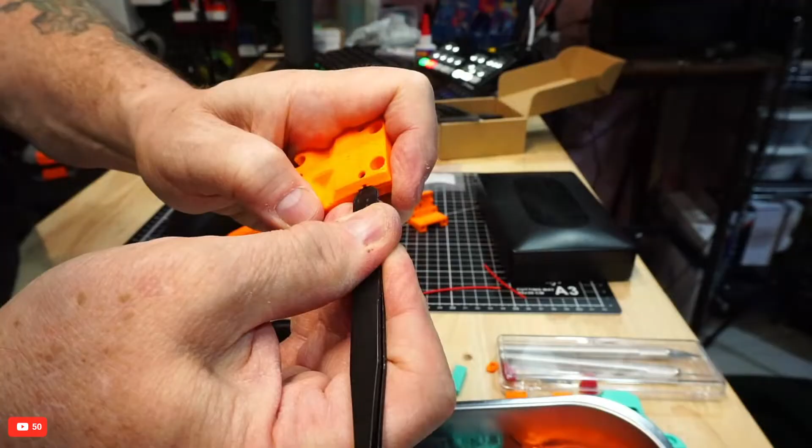I find this interesting, and this is going to beg the question, why? There, that nut insert, that nut is now inset in that pocket, okay? So we take this piece - this is mounted onto your rail. This piece comes down like so.

Okay, your hot end, you get your hot end coming over. Where did I put that bolt? Right here, there was two of them here - it doesn't matter, I have lots. We put this in, we have this in place. Then we go ahead and we tighten this.

And because I put that nut in there - oops, helps if I line the hole up as well. Come on. Okay, just got to line this up proper. Bear with me, come on. Find the hole. Okay, I got the hole here. This is just awkward to do when it's not actually on a printer.

So now I'm tightening this on, and it does get snug and tightened on, okay? Now, the thing I find - so that works when you put that nut in there. Now I'm going to show you my why question.

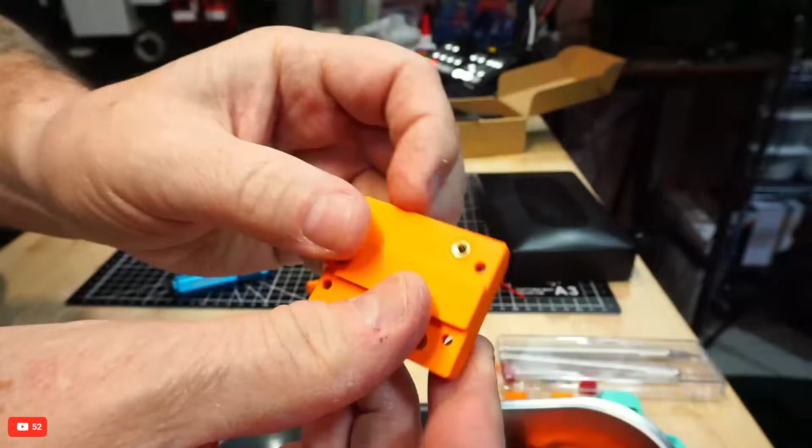Okay, so we take this off. We put a nut insert in there. Why do we have a heat inset back there? There's a heat set right there that lines up exactly with where that nut was inserted.

Why did we put these heat insets in? They're not being used. Unless initially they were going to use a heat inset, decided let's go with a shorter screw and we'll put a nut insert there. That's kind of a mystery question to me.

Both these heat insets line up with the mounts on here. So my thought is maybe they were going to use a longer one, but if you think about it, when this is slid into here, if you have a screw that's too long, maybe - what are these, M3x35s they're using? Yeah, these were M3x35s, I think I said.

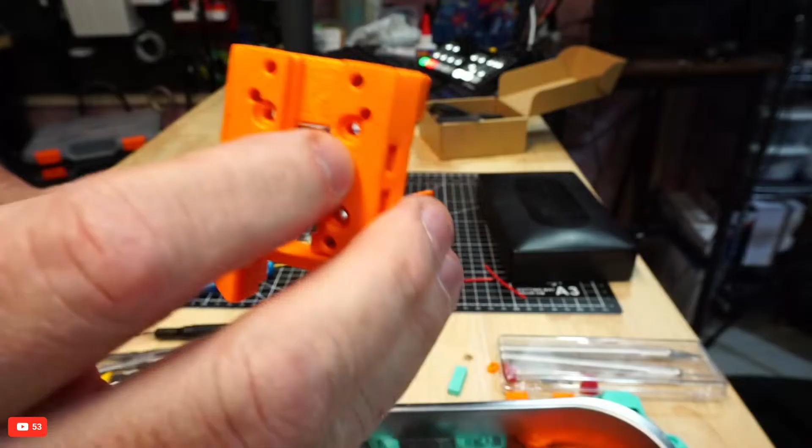So obviously the M3x35 didn't reach this, so they said okay, let's build a nut insert here so we can have the nut. Because if you go too long, you're going to flatten out against the plastic if you go too long with it. Or is that why they had that little spare hole here for a screw that was too long, to extend into there? Because there's no other reason to have those two extra little holes up there, other than if your screw was a little bit too long, you need a place for the tip of that screw to go.

So unless you use a longer screw, and that's why they have these things here. So if you use an M3 by 40, that's probably what it is - it would go through that heat inset further than it needed to be, and so they put those two holes here to allow the tip of that screw to have a place to go. So I'm thinking that gives you the option.

Now that I've put that one in, it's stuck in there, so I'll put the other one in and we'll end up using the 35mm screws. But yeah, I think that was - anyways, that's my relief hole. That's my philosophy, that's my take on it anyways, so what the heck.

So while I'm here, I'll throw this other nut insert in here anyways, because we will use the 35mm screws, which don't reach the heat insets. So it's almost like it was like, okay, you have a choice: use 40mm screws or 35mm screws, either or works. Am I sure those align?

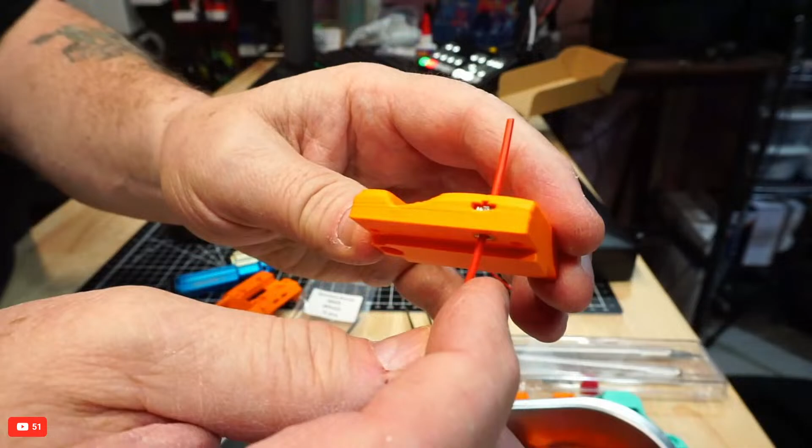Yeah, they do align, I can see right through. I'll show you. Here, let's get back to this one. So you can see where the nut insert is and the heat inset. If I look right there, they align perfectly. So that filament's going through both the heat inset and the nut that I put in there on both sides. Yeah, they align - those holes are the same purpose, so that is proof.

Yep, that's it. That's all we can do for now, until I rip that other printer apart, and maybe we'll do that next week.

As I say, I do have the Trident on the bench here because my goal is to get this Trident working again. I don't know - there's a reason I took this hotend apart, and I don't remember why. I've actually taken the extruder completely apart and I don't remember why I did it. All I know is that I'm very emotionally upset over the fact that I took it so far apart, and I don't know why, but I'll get over it.

Anyways, we'll put that together on a stream one day here as well, and we'll get this thing up and running again and doing some fantastic printing of parts.